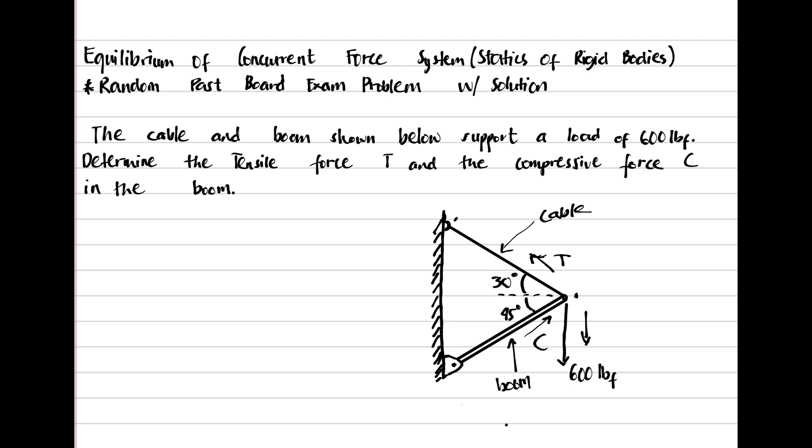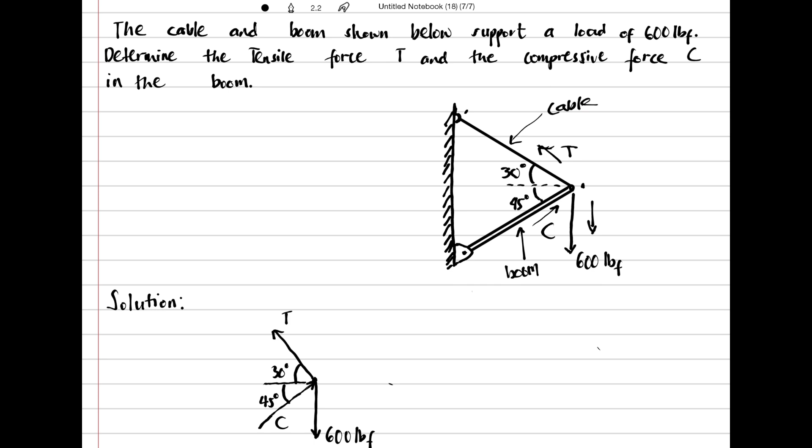Let us solve this kind of problem. For our solution, I made a simple FBD, free body diagram, of our system. If you look, we have the tensile force T and the compressive force C. This is called concurrent because the forces meet at one point.

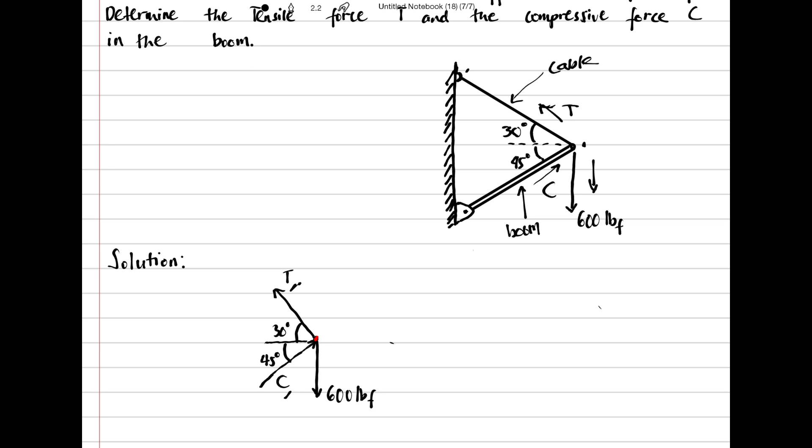Let's continue solving this problem. First, let's go back to the question: determine the tensile force T and compressive force C. First, you get the summation of forces, and we place the solution on the side.

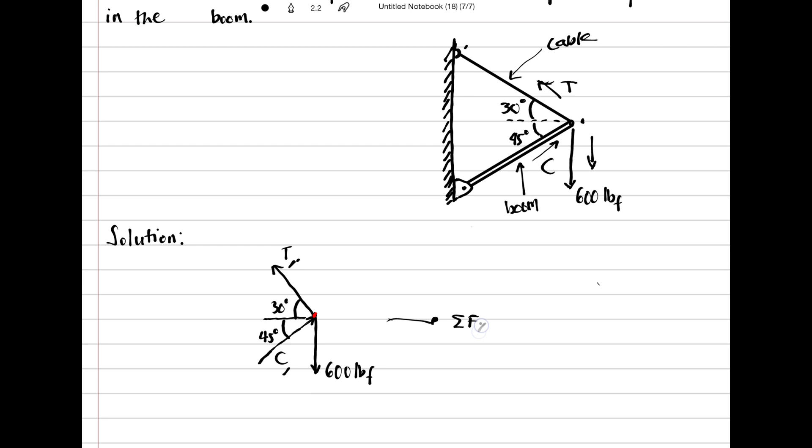Summation of forces along X. Since our topic is all about equilibrium, this summation of forces along X must be equated to 0 to maintain equilibrium. Summation of forces horizontally is equal to 0. Check: the compressive force C has an angle of 45 degrees from the horizontal.

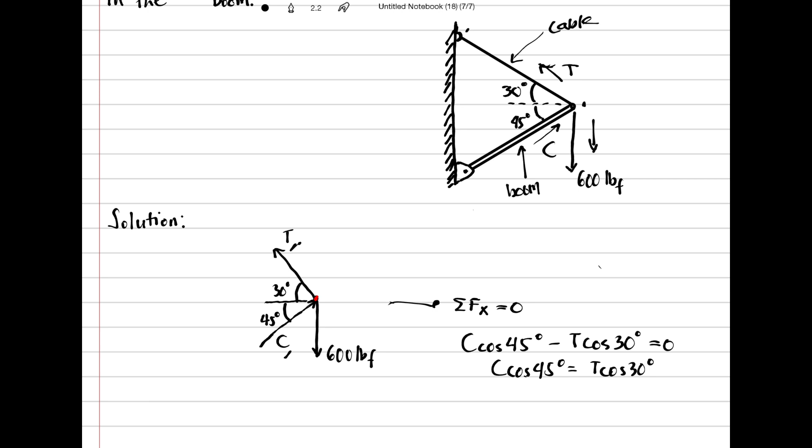Therefore, force C cosine 45 degrees equals force T cosine 30 degrees. That becomes the comparison between the two. Then get the value of force C right away - move cosine 45 to the other side: force T cosine 30 degrees divided by cosine 45 degrees.

Just solve it - divide cosine 30 by cosine 45. The result is 1.2247. So force C is equal to 1.2247 times force T. You can use that later as we continue to solve.

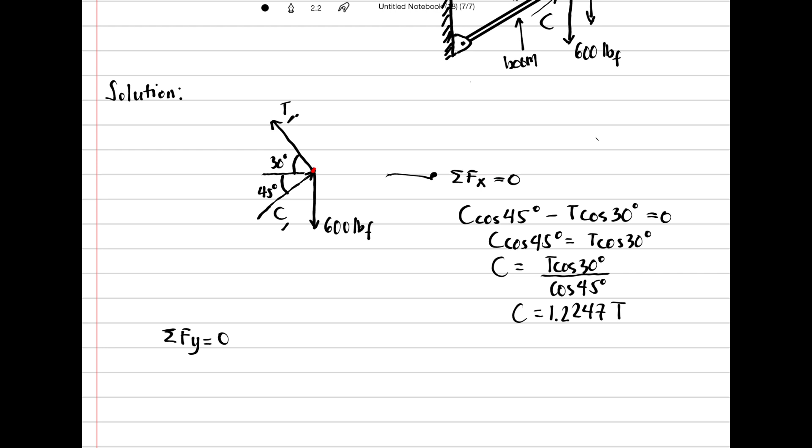This is your FBD: force T sin 30 - since you already used cosine for the x-component. So T sin 30 degrees, plus force C, the compressive force, which is upward so positive, C sin 45 degrees, minus 600-pound force, since the 600-pound force is downward.

Equate it to 0 since it's equilibrium. Next, move the 600 to the other side. So T sin 30 degrees plus, substituting C as 1.2247T, that's 1.2247T sin 45 - moving 600-pound force to the other side.

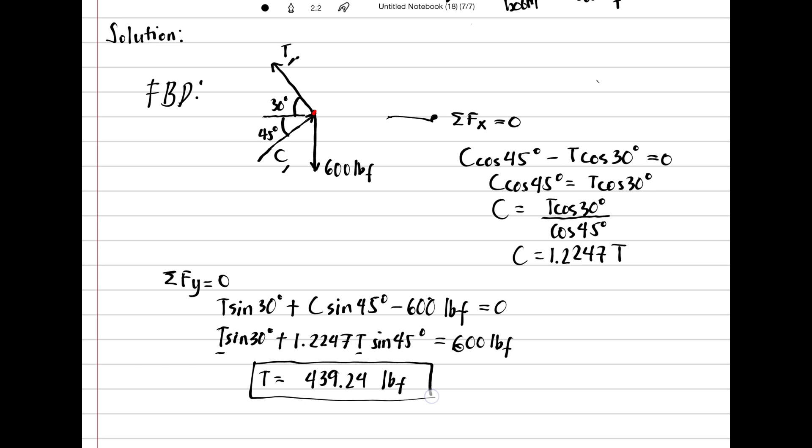The only thing left to require is force C. So let's get that now. As we solve for our compressive force C, it's just 1.2247 multiplied by the tensile force.

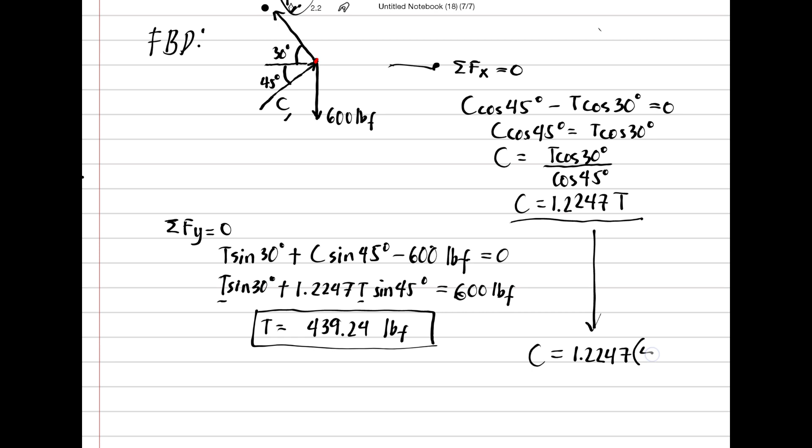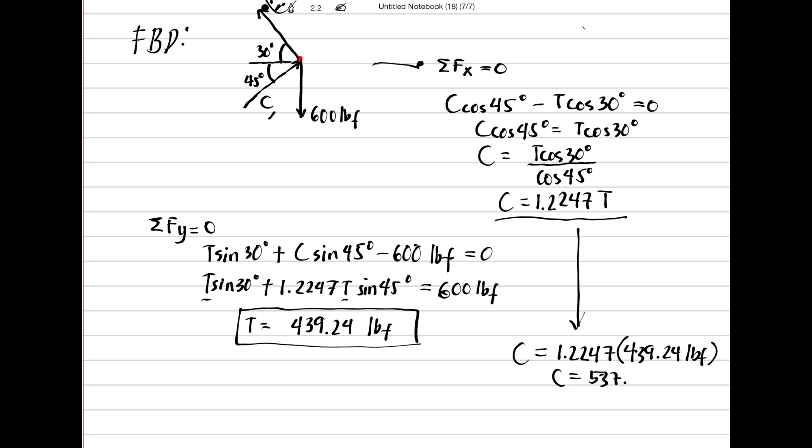That's 439.24. So 1.2247 times 439.24 gives us 537.94 pound force.

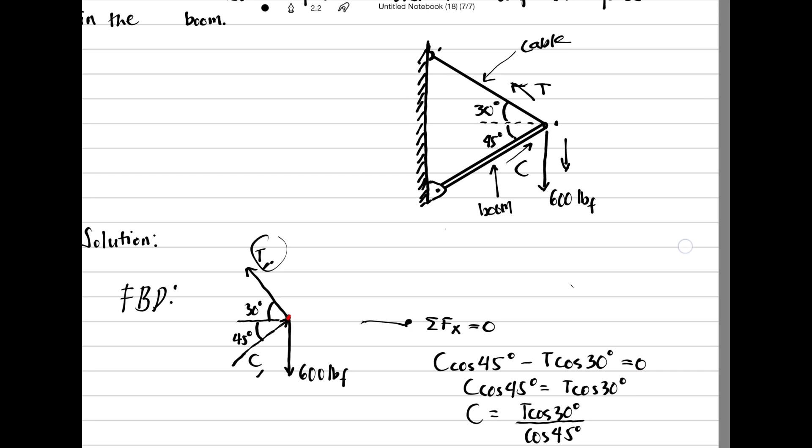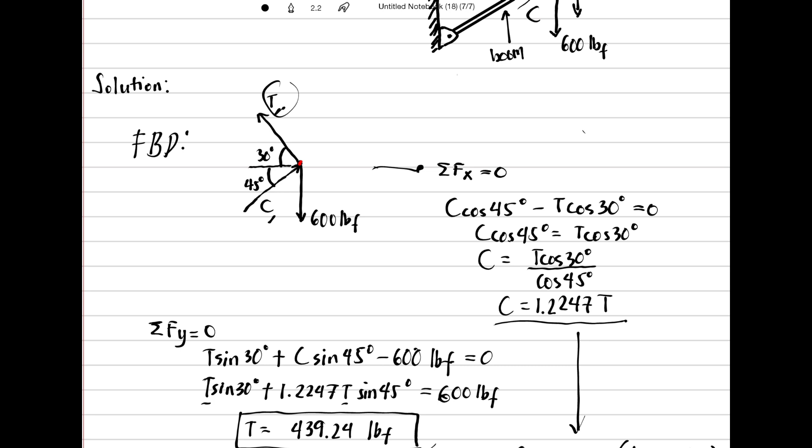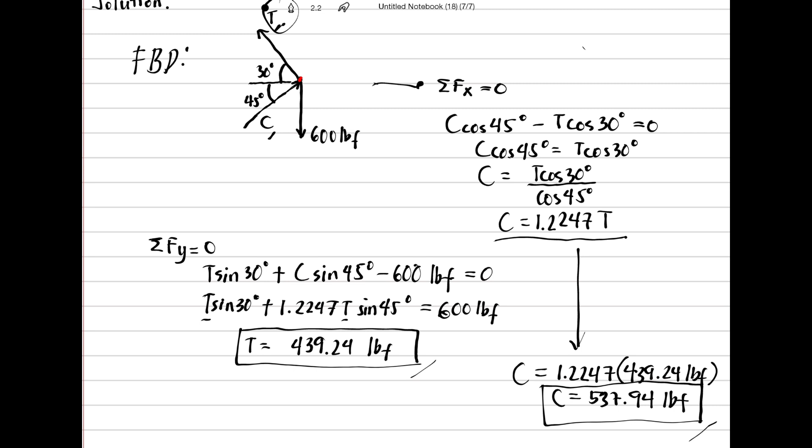You need to draw the FBD or free body diagram first before solving, so you can clearly see the forces that occur. Again, this is a concurrent force system. We first solve for the vertical and horizontal components of the force, then use whatever we find that can help improve the solution - like we did here, getting the comparison of C to T first, then substituting it into our summation of vertical forces to get T, then going back to the comparison we obtained earlier to get the compressive force C.